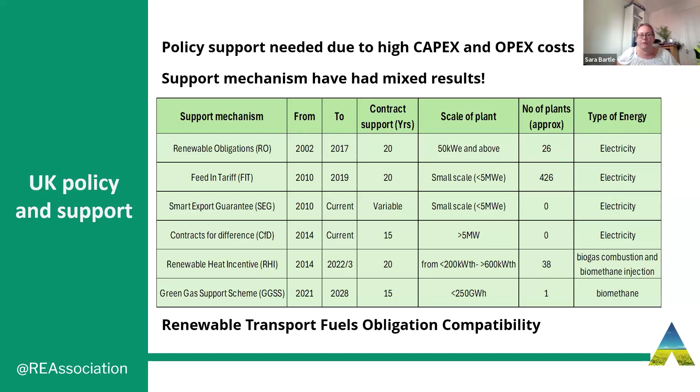So one of the reasons why at the moment we need to look at where we are with biomethane production in the UK is because the green gas support scheme clearly hasn't had such a good take up as we've seen in previous support schemes. Something that the government looked at quite a lot. There are annual tariff reviews. There was also a mid-scheme review that we went through, obviously asking industry to engage on what was going well, what not going so well.

And obviously I've included that table there. You can see some of the progress as we've gone from 2022 up to the present time. You can see that there's been quite a lot of scheme applications. Some of those will have been rejected along the way. Some have then been granted that initial notice tariff guarantee, moving on closer to a registered participant being the tariff guarantees. And so we've still got a few that could be going through, but we still sat with that one registered user for a while.

So there were two things that happened. They tried to change the tier 3 tariff to try and encourage higher production, the latter part of that tier 3, because it's banded. That was changed in October 2023, because originally it was a much lower rate. It's now more comparable with tier 1 and tier 2.

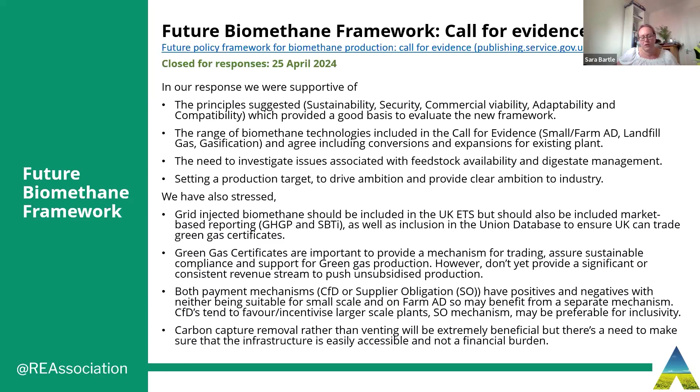We've also got production through the other renewable fuels, such as SAF, which is sustainable aviation fuels, as well as renewable transport fuels in general. And we've got a similar biomethane production consultation happening in Northern Ireland to try and bring that into alignment, which it hadn't been under the scheme so far. So I think generally, depending on how this future biomethane framework works out, there's a lot to be optimistic about. But hopefully it will be as ambitious as this framework actually pushed through. So hopefully we'll be expecting to see something at the end of the year on that.

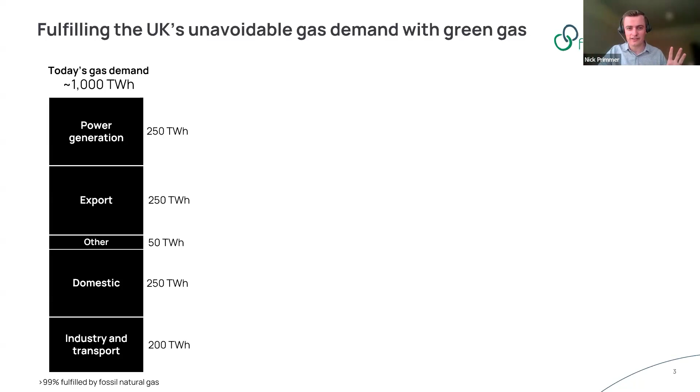So to tackle the UK's gas sector, we are fundamentally going to have to change how it looks. And the first thing we should be doing across the UK is looking at how to reduce that demand. We can take that demand down from 1,000 to around 100 to 300 terawatt hours, which is generally considered the unavoidable gas demand of the future.

This is a system where power generation is increasingly from wind and solar, so that gas is only used perhaps to provide that baseload capacity, or even that peak generation when the wind isn't blowing and the sun isn't shining and you need a bit of gas to keep that energy system going.

And similarly, you've decarbonized or electrified much of the low-grade heat, so using heat pumps wherever possible. In industries, electrifying heat if it's not particularly intense heat that's required. And similarly with transport and industry, electrification of transport, again, wherever possible.

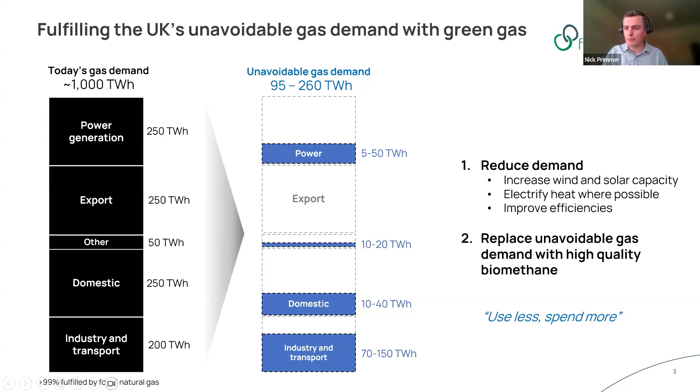All the result of which is bringing down to that unavoidable gas demand. And then that is what we must focus our valuable biomethane on, to decarbonize that. So it's about using less, but spending more on that better, higher quality product, which is needed in this net zero transition. So what can biomethane do to fulfill that unavoidable gas demand?

Recent research has suggested that across the UK, we could easily produce over 100 terawatt hours of biomethane per year from sustainable feedstocks. That includes your food waste, livestock wastes, grassland from pasture land and animal livestock, rotational crops, so re-looking at how we grow crops for food and longer rotational cycles, and also crop residues from the processing of those crops themselves for food markets.

So at 100 terawatt hours, we could feasibly fulfill the UK's entire unavoidable gas demand at the lower end, or at least half, a third, whatever that final number is, a significant material proportion of the future heat demand in the UK. And at the moment, we as an industry are doing well. 6 to 7 terawatt hours of biomethane is currently produced from its 120 operational plants. That puts us in the top 5 biomethane producing countries in Europe.

And we've got an additional 10 terawatt hours of biogas, which is currently being used to generate electricity as per the support schemes that Sara was discussing. And that's more energy, more gas that could potentially be converted into biomethane, into this valuable heat demand for heat decarbonisation. But as I say, there is a lot of room for growth of these figures.

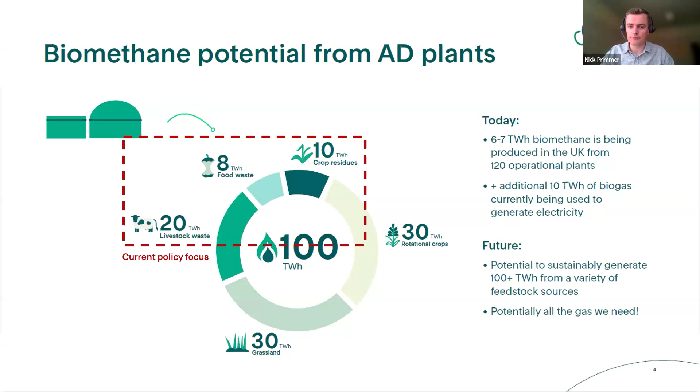And within that rotation, one of those crops is a break crop, and that can be a break crop grown for AD. So that is a new source of biomass for biogas production that can support a transition to more sustainable arable agricultural practices. And that's exactly what we're doing at Future Biogas. So we are getting into contracts with farmers to supply rotational crops using regenerative farming practices throughout that cycle.

So it's not just about the crop rotation, it's about use of cover crops over winter to protect your soils. It's the use of digestate back to land as a source of renewable biofertilizer. It's the reduction in tillage to, again, protect the soil and maintain the organic content of your agricultural soils. And that practice not only supplies us with that valuable supply of high quality feedstock, but also supports carbon sequestration in the soils. We're looking at about 0.5 to 2 tons of CO2 equivalent sequestered in soil per hectare. So you're delivering nature-based carbon removals that truly benefit the farmer and their farm.

So from that gas, of course, we're producing biomethane, and each plant would produce up to 150 gigawatt hours of biomethane. And that's the equivalent of reducing greenhouse gas emissions by 27,000 tons per year. And not only that, in the biogas upgrading process, we're capturing that biogenic CO2 and taking it for geological storage. And by locking that away into geological stores under the North Sea, we are further removing 21,000 tons of CO2, which originated from the atmosphere, and locking that away in permanent stores.

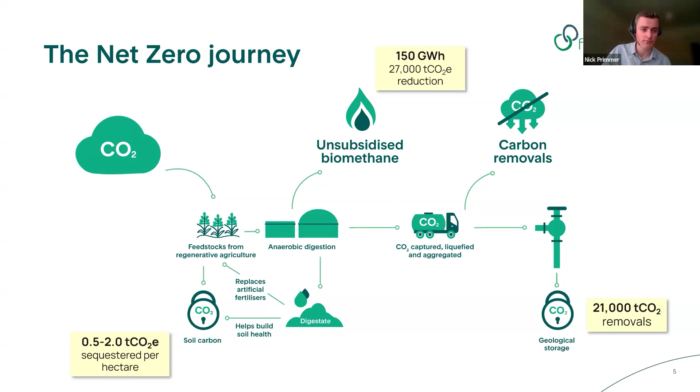The government have already said that there's not going to be another tariff-based support scheme after the Green Gas Support Scheme. So we're going to have to break that dependence on subsidy. And the way we're doing it at Future Biogas is by valorizing the CO2. So by capturing it for geological storage and generating those greenhouse gas removals, we're generating a new income stream from our products. And that can be sold to the corporates to offset those unavoidable emissions.

And crucially, being unsubsidized, the biomethane holds a greater value. We're getting into long-term offtake agreements for our biomethane. Our flagship deal is with AstraZeneca, whereby we are sleeving the biomethane through the gas grid to AstraZeneca to decarbonize their gas emissions and Scope 1 emissions. And because it is unsubsidized, they are fully funding the production of that gas. And so they can claim full ownership of the carbon savings that have been generated.

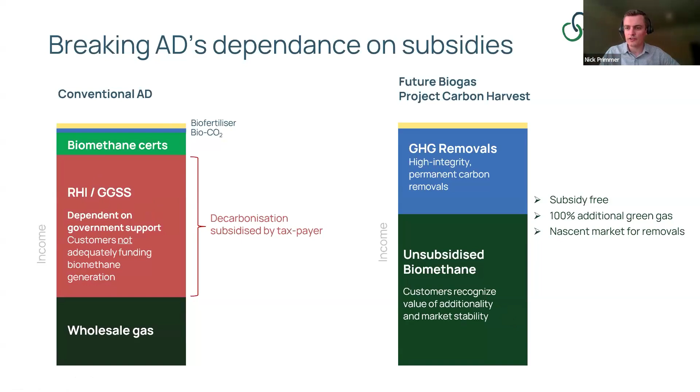So this is the value of that unsubsidized gas. And by getting into long-term offtake agreements, so with AstraZeneca, it is a 15-year offtake agreement, we're replicating that financial stability that has been long provided from your support schemes. So your 20-year RHI support or your 15-year Green Gas support. So that's really de-risking the investment, de-risking the deal and the market to give us the confidence to build new plants under this model.

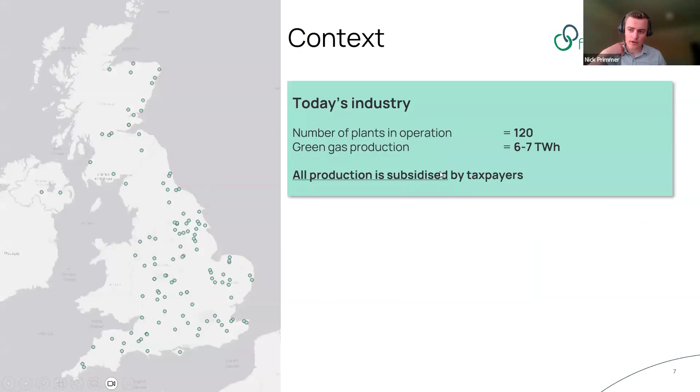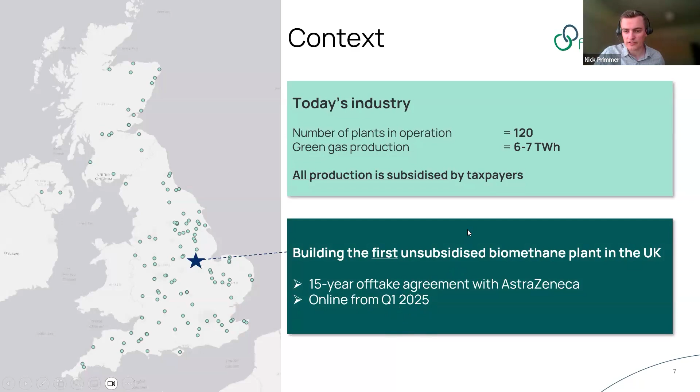So as I mentioned, here is a map of the sort of 120 biomethane plants currently in operation, producing 6 to 7 terawatt hours per year, all of which subsidized by taxpayers. And we are now building this first unsubsidized plant in the UK, in Lincolnshire. So this is due to come online early 2025, and this is the plant that will be supplying AstraZeneca with its unsubsidized biomethane.

And just to summarize and conclude these points, this approach represents a new approach to AD in the UK. It's working with farmers to decarbonize their production, allowing them to produce lower carbon food and energy and de-risk their practices, while supplying us with a secure supply of high quality feedstock. We benefit from predictable feedstock pricing and a secure supply which we can predict year on year. We're also helping decarbonize industry, improve soil health, sequester carbon, develop the growing greenhouse gas removals industry, and ultimately all of this combines to deliver benefits to the UK.

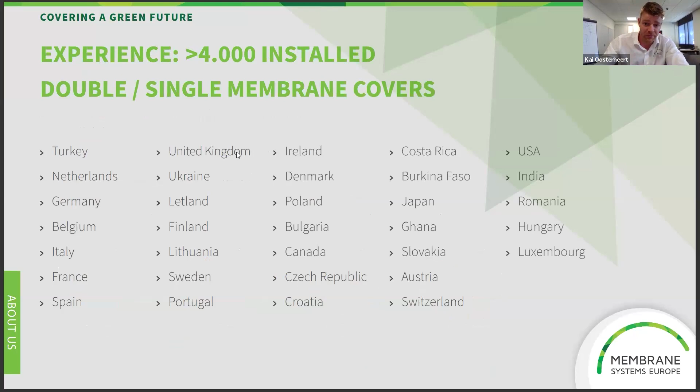To keep up with high quality, all the roofing systems we supply are in line with Eurocode 1, 120. This has been developed in Germany. Germany is one of the builders of biogas roofing systems, so they formed the Eurocode 1. Eurocode 1 is also covered by the TRAS 120, and that means, in fact, it's so safe that you can live as a human being underneath these systems.

To keep up with the development in the market, we see a huge change at this moment where we used to generate electricity with our roofs. And nowadays, biomethane, so the biogas upgrade, is coming up. At these plants, you don't easily produce your own heat anymore. So therefore, you need to heat up the tanks without getting the heat from the engine that burns the biogas.

So we introduced three insulation concepts. Number one, that is a foam insulation. So the top of the inner membrane gets insulated with a 16 millimeter non-hygroscopic foam, which doesn't pick up any water. This foam reduces the heat loss through a membrane by almost 50%.

Next to that, we've got a thinner one, that is the low E. Low E is a special coating above the inner membrane, and this reduces the heat loss by about 20 to 25%. You must compare this to when someone had an accident, they get picked up by an ambulance, they get a thin aluminum coat around, and the heat stays in.

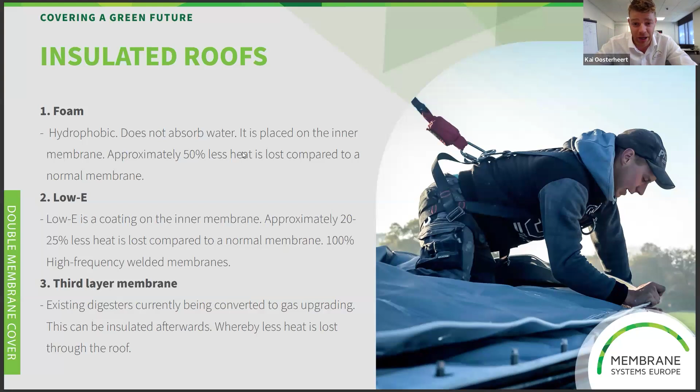And then the third concept is really interesting at the moment, because when a plant does a turnover, we can introduce the third layer membrane. That means you get a new additional membrane between the two existing membranes. So then you after-insulate your operating digester without replacing the inner membrane. So then you can be running again with an insulated roof for years.

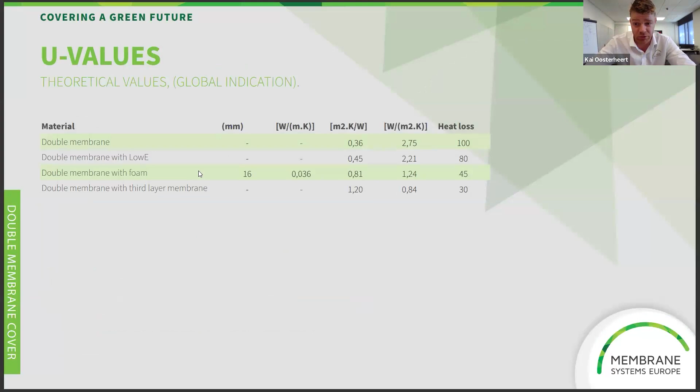These are the U values given for these insulation versions. Let's assume that the heat loss through a normal membrane is 100%. Then with the thin aluminum coating, we reduce that heat loss to 80%. With foam, we can reduce that heat loss to about 45% through the membrane. And with the third layer, we can bring that down to almost 30%. So it's a payback system.

Next to that, we see that these flexible solar panels are picking up. Everyone is really interested, and we see that the yield of these is getting up as well, almost at the same level as normal traditional panels. We patented the system with a special Velcro layer. So in case of service or in case of a broken panel, we can easily replace these panels. So in fact, if a manure silo only costs you money, now it will give you payback after a few years.

We are not storing only biogas. Next to that, we are storing hydrogen. We've got a few projects here in the Netherlands that we are developing to store hydrogen within the roofs. As known, hydrogen is the smallest molecule on Earth, so it can easily penetrate these foils. We found a special way to keep it in. So there we're working on it.

Next to that, we are storing syngas in our membranes, and we are storing CO2. CO2 often gets used by crop growers, where they used to burn wood chips to heat up their greenhouses. Then they store the CO2 inside our storage systems. For example, this one in the Netherlands, which is 90 meters long and 60 meters wide, with a storage capacity of 8,500 cubes. When the sun is gone by night, the CO2 goes through the greenhouses and keeps the paprikas growing.